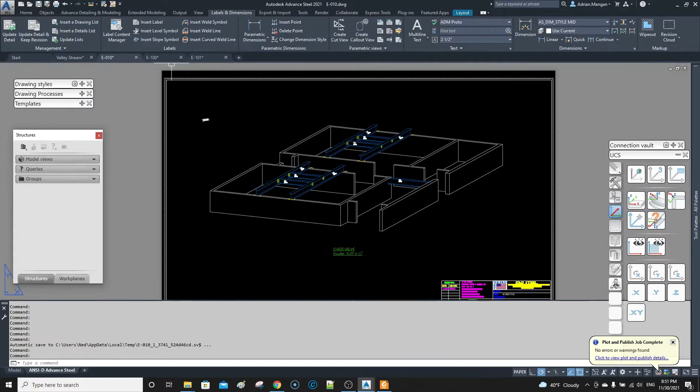So I'm going to finish here, or start where I finished the last video. We have already output these three drawings. So we have this one, and I'm not going to clean them up. I'm just going to leave them the way they are for now because we won't waste any time doing that.

And we have a couple of views here, which obviously you want to move around, put some hatching in, just general labels are right. We're missing the weld label off that one, things like that.

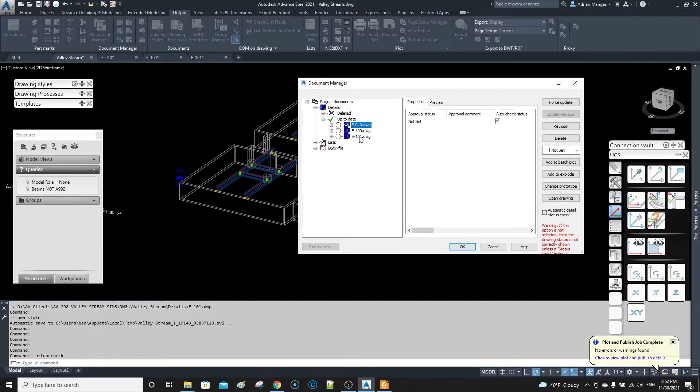All right, so let's say we want to output this project to a PDF. So what I do is, we want to send an approval in. So let's go to output, document manager. Okay, and let's go to our details, and we can see these three are up to date. So select all three, add to batch plot, come down here.

I did not want to print there, so this will print these out one at a time, so they'll all be separate files.

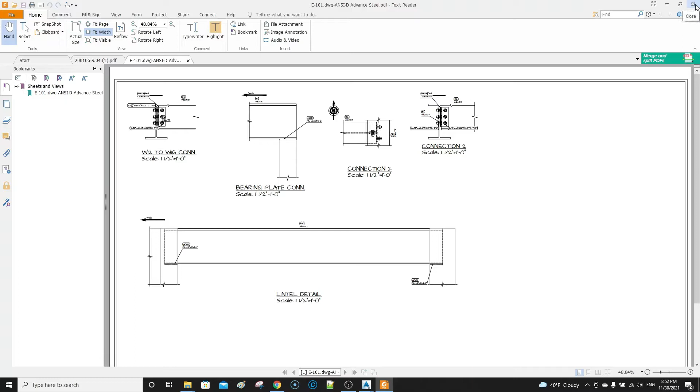So you can see my walls come out in gray because I have them set to gray, and I have them set to plot to that color. So let's close this for a second. Let's go back here for a second.

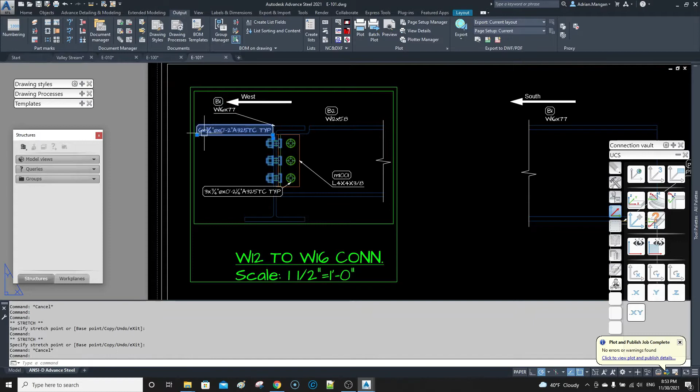Let's just, I'm not going to add anything, but let's try and make this look a little bit better. All right, so we'll just move a couple of labels around. And you know, you want to add in your dimensions here.

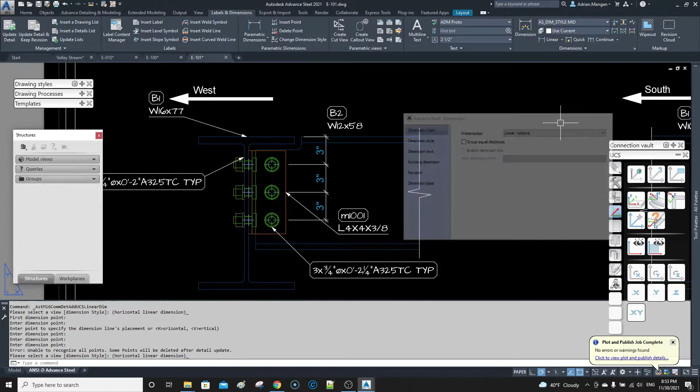Now, you can set it up to have all these come in automatic, which is fine. The dimensions can be a little more difficult to get right. But for now, I'm just going to leave it like that. We'll move it in a little from the corner.

All right, so to output this, if you want to change your output, we just go to plot here. And this is your plot style here. So you can have different ones. But I just changed the Advance Steel one generally.

So you can see color 1 is going to come in as black. And if I go to color 8, you can see it's going to come in as object color, which is the gray color. And then also this gray here, 253, I have to come in as object color. Most of everything else comes in as black, so that they plot out as a black PDF, which is what you want.

Now, sometimes I will put things in red, and then I'll just switch this to come in as object color. But for now, that's fine.

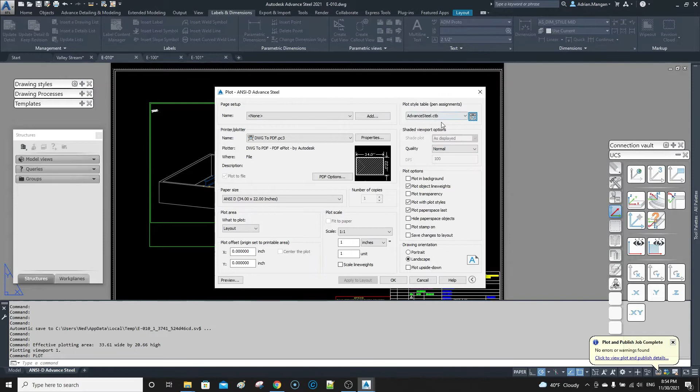So this is assigned to this drawing. So if I come in here and this prototype, if we come down here and check in here and go to page setup and go to modify, you can see that it's set up here to use that one.

Controls whether the properties of plots that are assigned to objects are displayed on the screen. So I don't need that on. So that's fine. Sorry about that.

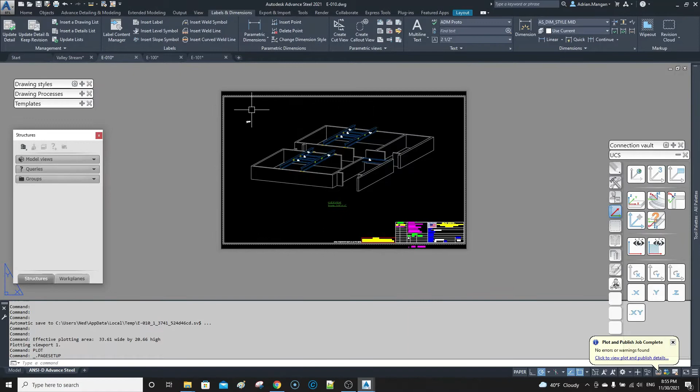So what I want to do is we want to plot this out. So we'll go back to where I was a minute ago. We've got the document manager, and I want to plot them all out into one PDF. So what I'm going to do is come in here, select them all, add to batch plot.

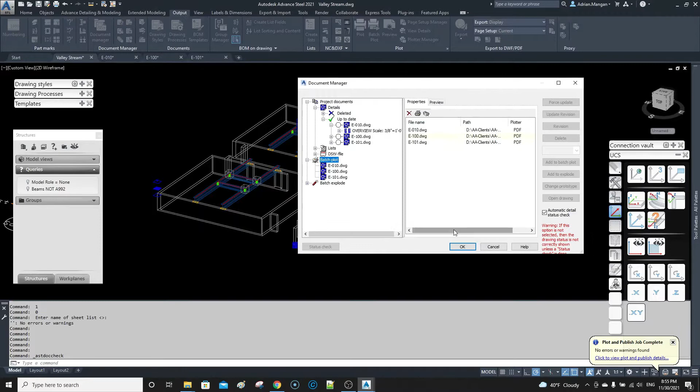Now, if anybody wants to send the DWGs, you can also come in here and do add to explode. And now if I go into the batch plot, choose a plotter, go to PDF, and I don't want to do single file. I like to output them as a multi-sheet. Now some people do single files. Okay, and then print. So that's going to print those three out.

You can see it works away here, and it'll open it automatically, or it should. No, it doesn't always. So what I'll do is I'm going to go into the folder, and it'll be printed out with the DWG.

So these are the three I did by mistake, so I can delete those, and this is the one that I want to send for approval, right? So I'm going to rename that, and we'll rename that approvals and 0, because it's going to be the first one, and then I'll give it the date 11/30/2021.

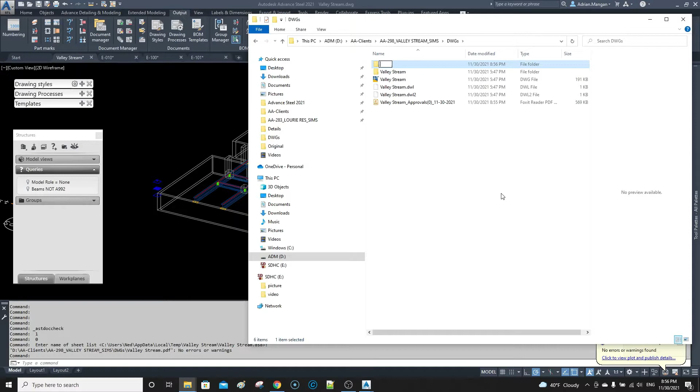And that's going to be our approval, right? So what I'll do now is I'm going to do a new folder in here, and I'm going to just call it Fabs, and whatever you want to call it after that, it's up to you. So I'll just call it Fabs for now. I'll go back to the drawing.

So what we can do now is we can output these files. So let's say it's approved and they want the piece details. I've already numbered it, so now we're ready to output. So let's turn off the cameras. Now what we can do is we can do this in 2 phases.

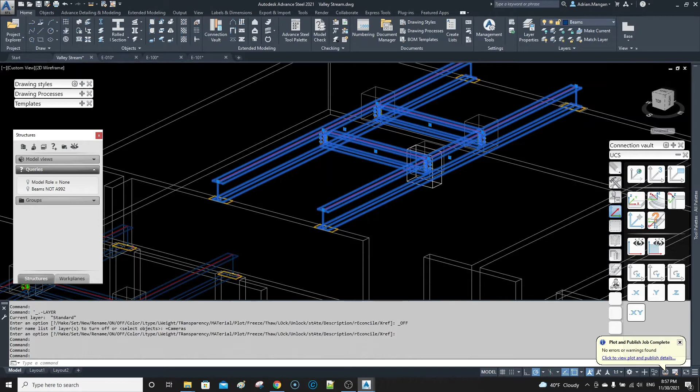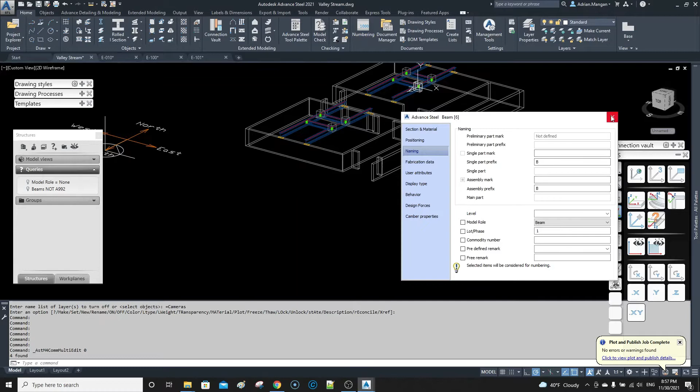So what we can do is we can select this, and what we'll do is right click Advance Properties and Naming, and we're going to call this lot phase 1 and tick this box. Now ticking this box takes this into account for numbering, so I'm not actually going to do that in this case. And then we'll pick these other 3 beams,

Advance Properties and Naming. Did I do 2 for the other one or 1? So I'll do 2 for this one. Did I do 1 for this one? Yeah, I did 1. Alright, sorry, losing my mind. So 2. Alright, so this is set to 2 and this is set to 1, and I do not have it affecting the numbering. So you can renumber if you want to, or you can not renumber.

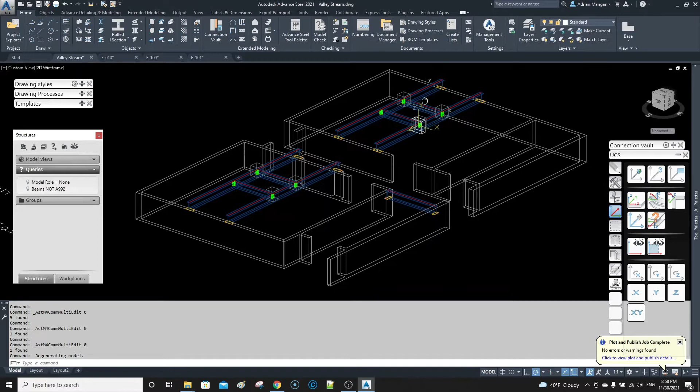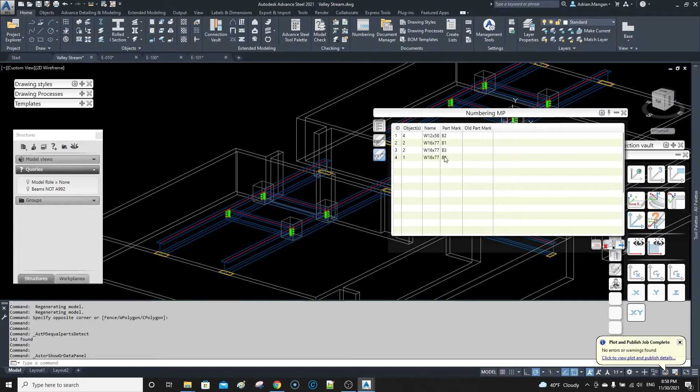Now I want to output the material lists and all that, so it's probably good practice to run the numbering. If I didn't tick the box, it shouldn't change any of the numbers for me. So let's just see. So I didn't tick the box and everything is fine. Now if I did tick the box, it would separate these 2 from these 2. So 2 of these would end up being numbered as the next available number, which is B5.

So I won't do it right now, but you know what I mean? If I come in, if I select all these and tick the box next to the lot phase. So I'm going to leave it for now. So the other thing you can do is create a query if you want, and what you can do is objects, and you can do steel beams, folded plates, okay, general, and assign a color, and we'll call it yellow.

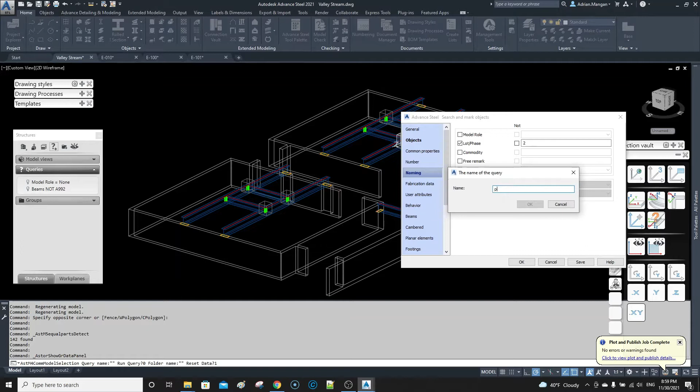And let's go to naming, and I want to do lot phase, and I want to do lot phase 1. Let's do lot phase 2, because I'm not sure I'll do both of them. So save that as phase 2. Okay. And that's saved that up here as phase 2, you can see. So okay, and now it has selected everything that has phase 2. So every beam and every plate, every folded plate, every folded beam.

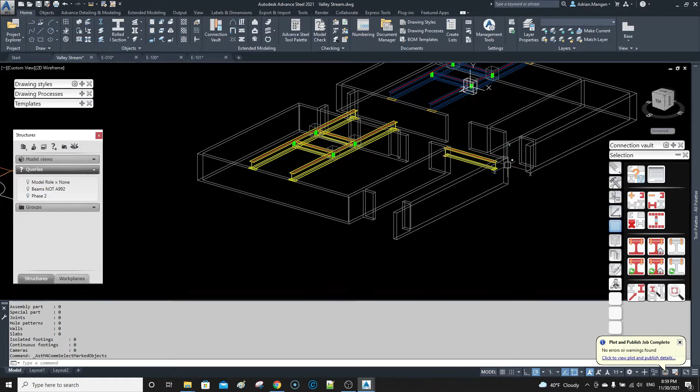So what we can do now is we can select all of those, and if we want, we can separate the files for this. So what I do is I have a token in my lists, so I'll come in here, and let's say I don't have the project data in here, so let's put the project data in here. So let's call this Valley Stream, and project number, we don't have a project number, and client is myself, and the building is Valley Stream, and the location is Valley Stream.

And then you can come into your project info, and I already have these 2 set in my template. So let's put today's date in, and let's put in next month's date. Now what I do down here is I have attribute 2 set to architect, attribute 3 is for the engineer, and it'll fill it in my header, in my title block. Number 5 then is the one I used in my material list, so I'll call this phase 2.

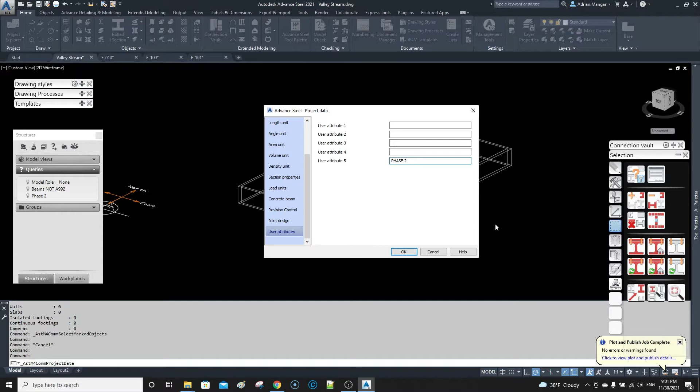Okay, so I already have highlighted the phase 2 beams. Now I'm going to select them. So I've selected them, and what I'm going to do now is I'm going to do a material list. So let's come over here. I'll do an assembly list first for these. This is just to show you. I'll go back. I'm just going to do one list for each, but just to show you how you can select a phase and then put it on a drawing.

So you can see now in this phase, it's showing you the two B2s that are there, and the two B3s and the one B4. So that's the B4 that's over the door. So you can see, and it says up here phase 2 because I have that attribute in this box here. It's an assembly list, so that's fine. So what I'm going to do is I'm not going to save that.

What I'm going to do is I'm going to go back in here and change that token or change that attribute, and I'm just going to call it structural. Okay, and now I'm going to select all the steel here, and I'm going to go to assembly list. I don't create lists the other way. I like to do it this way, and just create new ones each time.

So here you can see 2 B1s, 2 B2s. These other 2 B2s are separated because I have the lot phase. So if I remove the lot phase, these should go in as 4 beams. So you know, I guess I'm not really in a hurry, so let's... we won't be able to delete them that way.

You know, I'll just leave it as it is for now. If you don't put the lot phase in, it'll keep those two together, right? So I won't get into it now because I'll have to go back and delete the numbers. So I'm not going to worry about it.

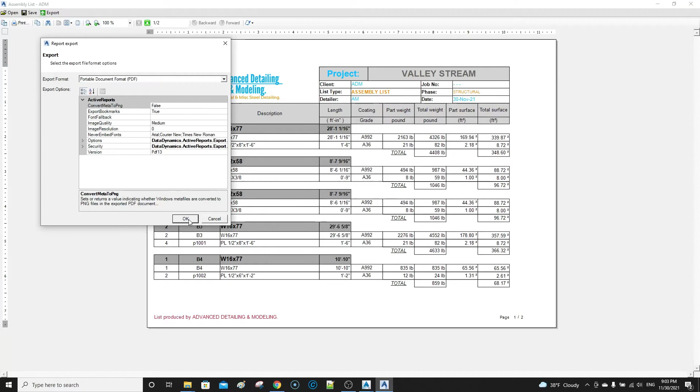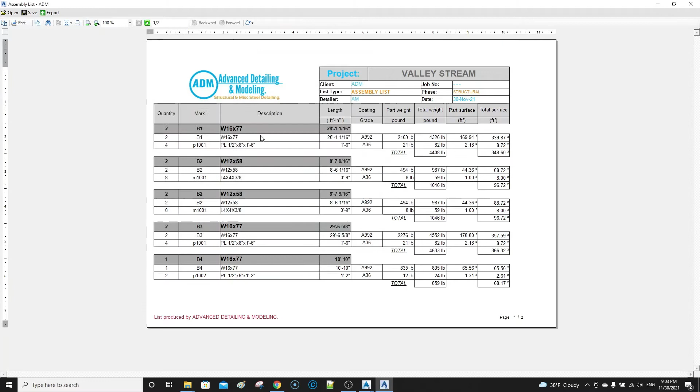So we're going to output our list here, and then we're going to export it, and we're going to save this. It's going to be in the folder we want it to be in, and we're going to call it assembly list Valley Stream. Oh, sorry. Valley Stream, and today's date, and save that, and then we can close that. No, I don't want to save that, and then it's already highlighted, so we'll just go to the next one.

We want to do material list. So the material list now shouldn't differentiate between these two beams. So let's see. So you can see it's 4 B2s here because right now it doesn't care about the lot phase number. So you see we have the plates here. This is all controlled inside in your bill of materials. You can change the order of these by material or by number or by weight, whatever you want to do. I have some videos on that.

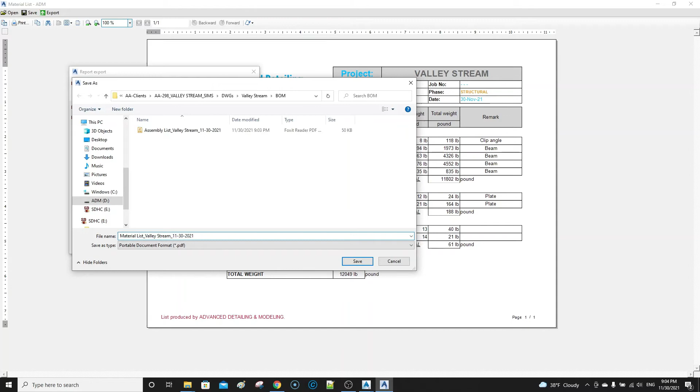So I'm going to export this. Okay. And I'm going to click on that name, and then I'm just going to come in here and change this to material. Okay, save. And then I'm going to close that, and I don't want to save that.

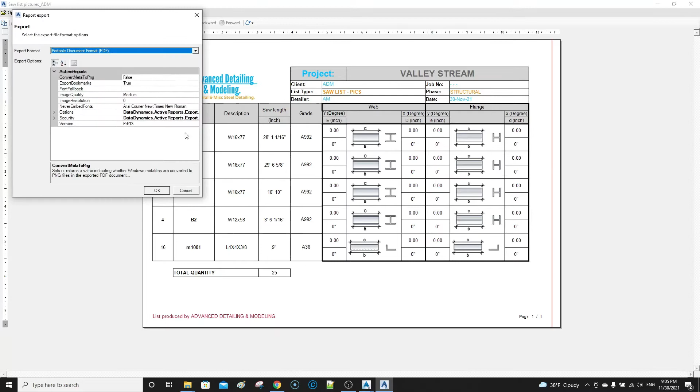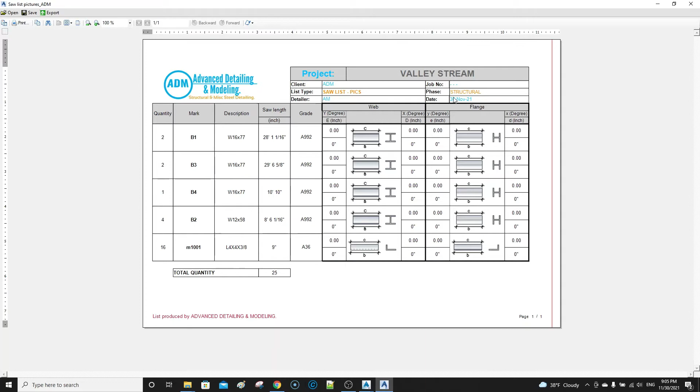And now I'm going to do a saw list with pictures, which is helpful at the start. That'll be the first one they want. These are all cut straight, so it's going to be a pretty straightforward list. This is it here, so it shows you the cuts and the angles, but there are no angled cuts on this one. So we're going to export that. Okay, select the material list, come in here, and saw list, or cut list as I like to call it. So you can see the structural is coming in here again, so that's my attribute 5.

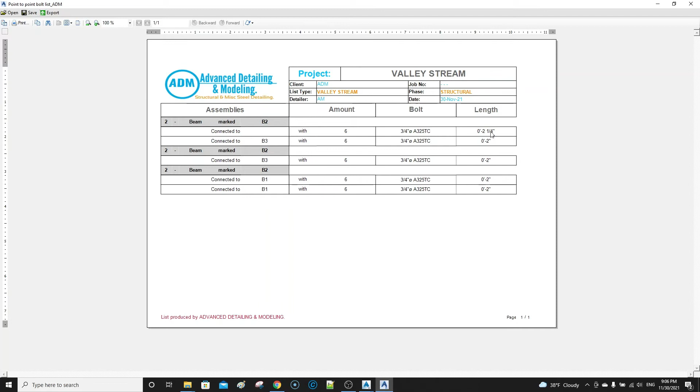Yeah, so the lot phase, I think, is kind of screwing this up a little bit. So 2 B2 beams here. Yeah, so that's why it's getting separated, because of the lot phase. It looks like I might be missing one somewhere. So anyway, I'd have to look into that. There's a mistake there for some reason. So it's the B2, the B1, B1. Yeah, it's got an extra line in here of these 2 1/4 inch bolts. Anyway, I'll just close that out for now. Let's not get into that for now.

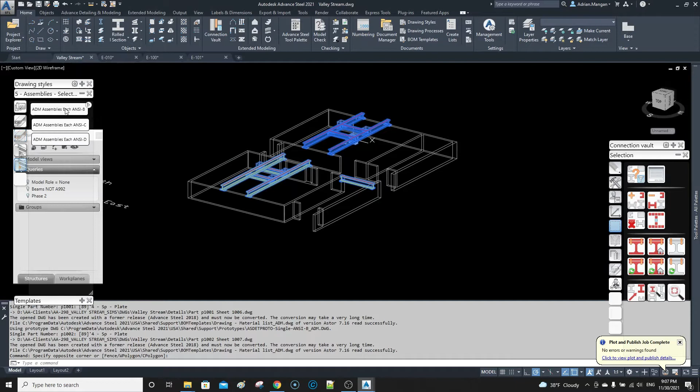So now you have your lists, right? So the next thing is you want to do your piece details. So you're just going to select all these. You're going to come in here and go to your single parts selected, and I can put the single parts on ANSI B. Okay. And you can see it flickers through every drawing one at a time, so there's not too many drawings. And then we want to come in here, select them again, and we'll do assemblies ANSI C.

Okay. Now some of these I don't have set up perfect yet, still working on it, work in progress. I'm certainly no expert. Just feel like some of the simpler things, you know, will get you going. I don't need to do everything. Just for small projects, this will be helpful, I think.

So output, document manager. Now you want to print your lists out at this point. You can see I have not exploded these. So you want to go in here, explode the documents. Those exploded documents now will show up inside here. This has just appeared, and these are exploded documents in here. So that's useful. Your bill of materials are in here.

So what I'm going to do is I'm going to copy those. And we'll come back here and we'll put them in here. Paste. And then we also have our approvals. We'll want to send them so they know where to put the parts. Put them in there. And the document manager details. And you can see here's all your part details. Update required for these because I was messing around with the lot phase. So it's okay for now.

So let's open all these and we can see what we have. We can see that's a single part. It'll take a second to open.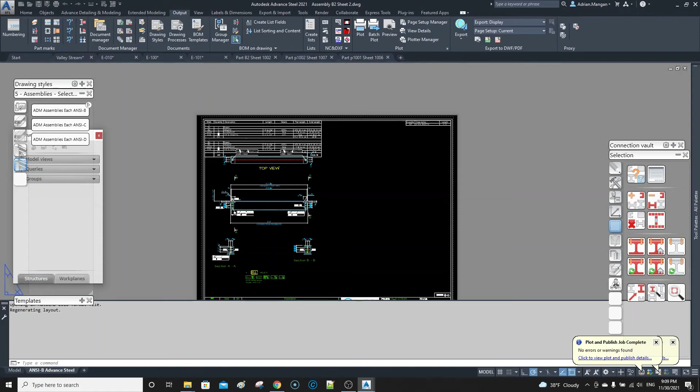That assembly looks okay. Some of them come in kind of funky.

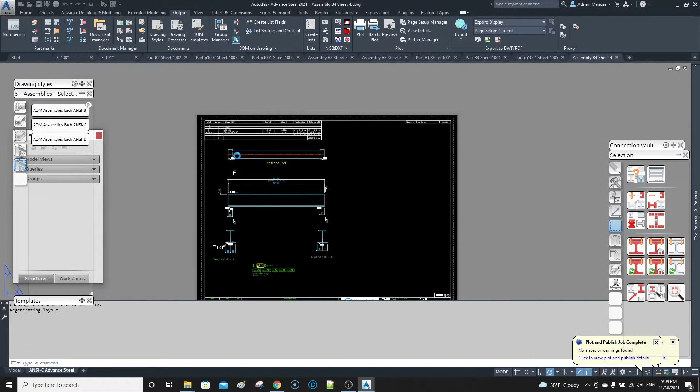Now I'm working on my laptop here, so this is a little bit slower. Please excuse my voice, I have a bit of a hoarse throat. So just give it a second. Like I said, it's usually open quicker on the PC at the office.

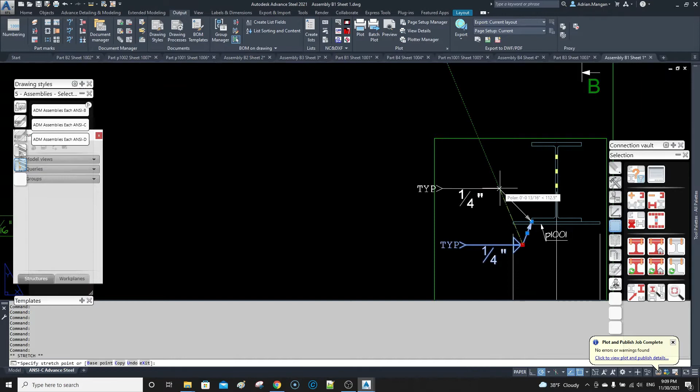So that's everything, right? So let's do this pretty quick. Let's try and tidy it up. I'd probably drag these two over. You have a weld detail here and it says typical, so you should be fine. The reason there's not one here is because I only put the weld on one end. So if you want to have the weld both places, put the weld on both places.

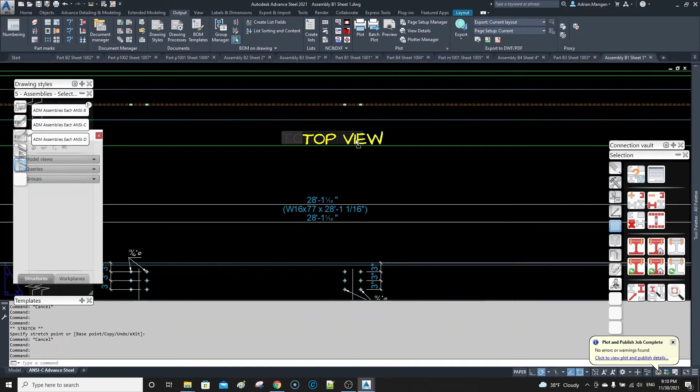So it's showing you the plates, so drag these out. You can see this is giving you a top view. Some of my clients don't understand that we use third angle projection and that a view that's on top is the top view. So you can see I also like to put this in so it's 6 feet between connecting members. So that's pretty straightforward. That one is okay, let's say.

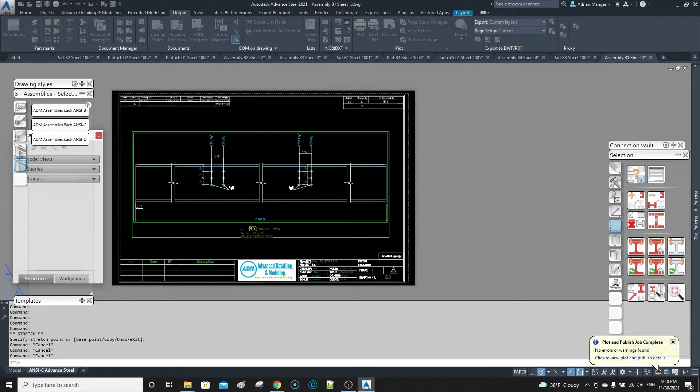So you might want to have a quick look up here, just make sure your list is okay. But so come in here. I'm not going to get into it too much. This one looks okay, right? We got the dimensions here, dimensions across the top. Okay. Now I might miss something, but I just don't want to drag this out too much. So let's move this up.

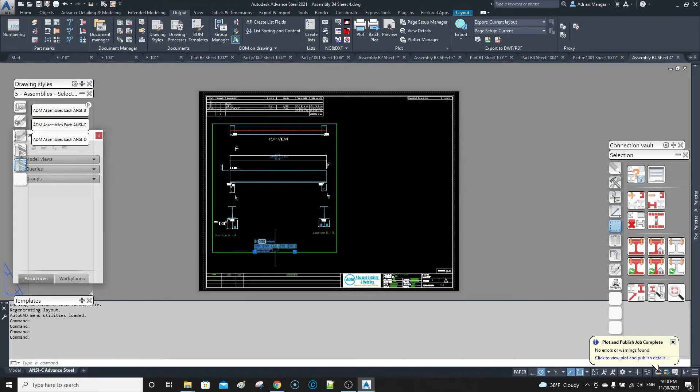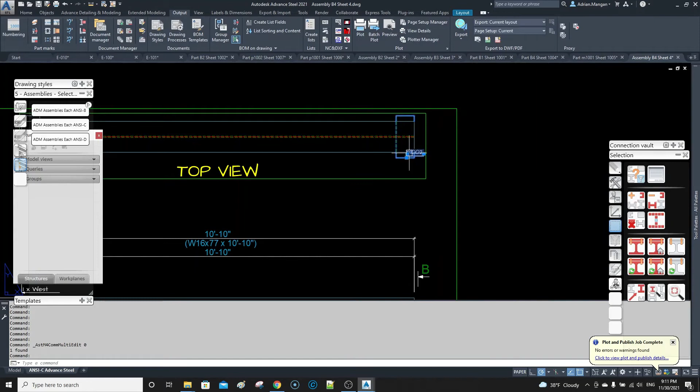I mean, if you want to rescale anything or check your clipping, just come in here. You can rescale it here, come into your clipping. Sometimes the clipping is grayed out. That's because it'll be set to automatic here. See the automatic? So that's okay. So we can close that for now. That's okay. You know, obviously you want to drag this down like this.

And you have this one. And you have your weld symbol here. You don't want the weld symbol pointing from the wrong side. So just things like that you want to tidy up. Close this. These clips, you might want to make them bigger. So you might want to come in here and you might want to up this to 3/8 or 1/2 inch, something like that.

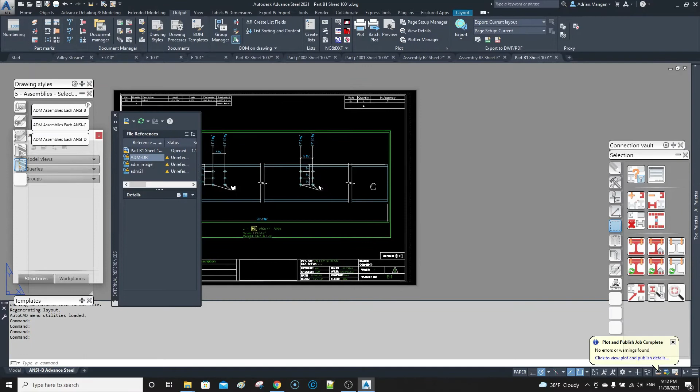So you can see over here, because I play around a lot, I've got some unreferenced references inside in this drawing, which I have to go in and delete. So I'm just going to ignore this for now. And that's just the beam. That's the lintel beam. And that beam looks okay, so we'll close that one.

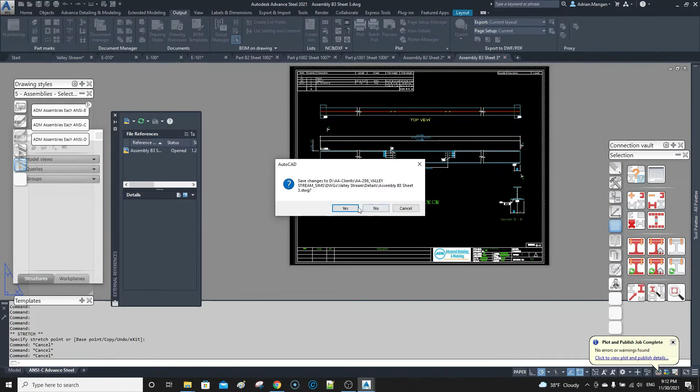Assembly, so you know, I'm not going to get into it, so some of them you'll have to drag. Probably because I haven't the page set up properly for the work area, so maybe you want to go and revise that when you're looking through. So close that one. And what else we got?

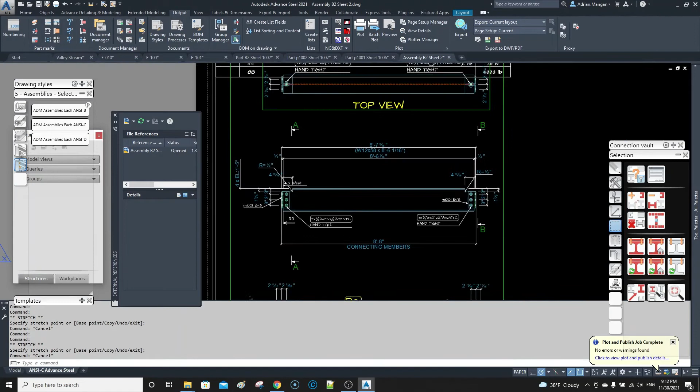Alright, another one here. This one has the clips on it, so I have these set to hand tight in mind. So this is a label I've created myself, because most times my clients just want to hand tight these bolts. It's good to have them tight because you don't want the guy to try and install them with loose bolts. It's a bit of a pain. So if you have a crane or something, that can be a pain.

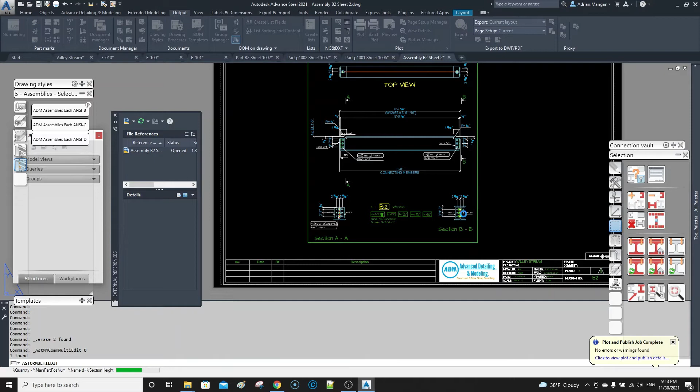I don't need these ones here, so I can revise this drawing. If we come in here and check the scale, let's say you can up the scale and make it a little bigger. Everything else seems okay down here from a distance. So you just want to move. I don't need these because I have single parts. If you want to remove them, you can. You can see now that that's clipped that.

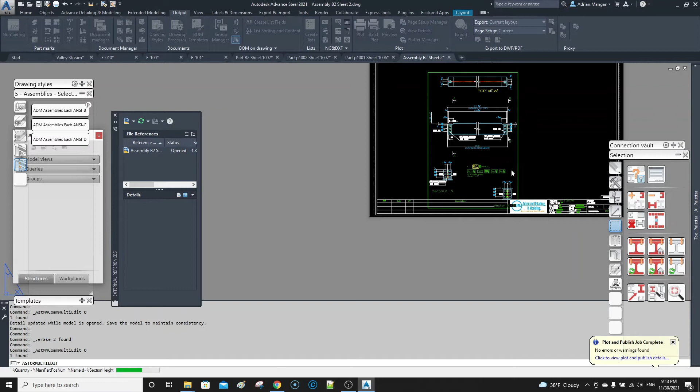So what we can do is we can go into the clipping and you can either remove the clipping, or what I like to do is put this up to 6. And then it won't go off the page. But this is a small enough beam that it's going to remove the clipping totally. Now let's see if this, yeah, this one moved back up, so that's okay. Let's call that good enough. And now we got our plates, and we're going to have 8 of those plates, so that's good. Yes.

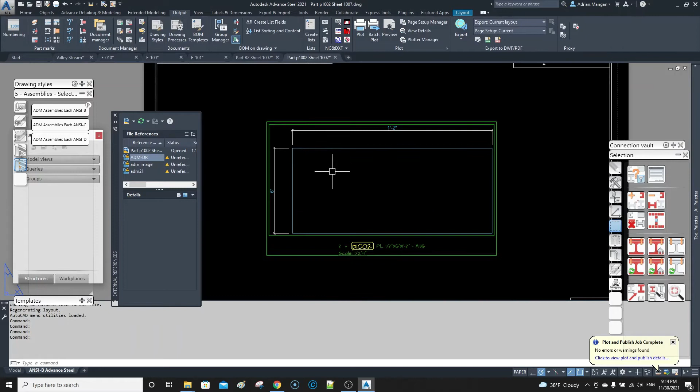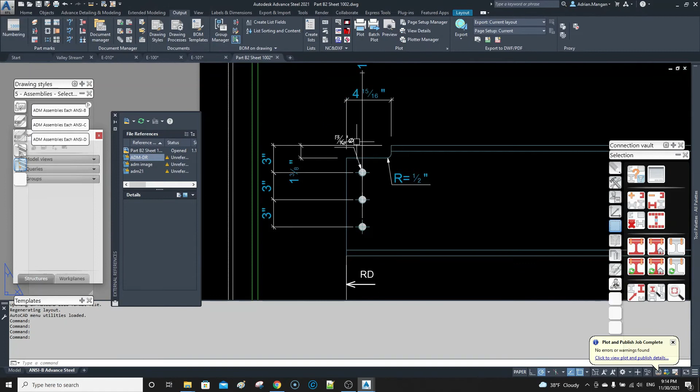Another thing I do sometimes is on the assemblies with these plates, I should have shown you before I closed them. On the assemblies with these plates, sometimes I put it in as a field weld, and I'll just put wire to ship so that the plates will go with the beam, but don't weld them on in the shop because they need to be welded on site just in case the wall is not exactly where we think it is. So let's say that one is okay.

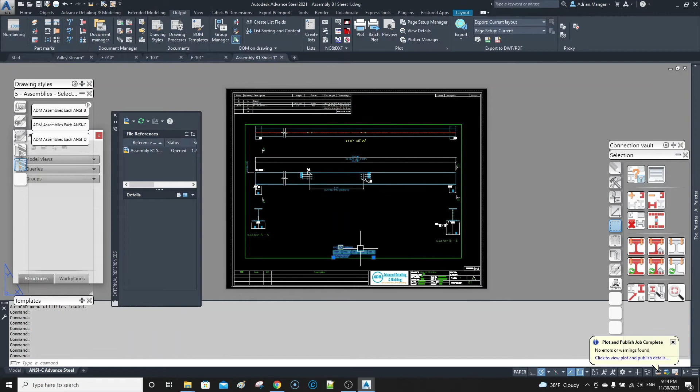So let's go back and we'll open one of them. Let's open B1. And if we go to B1, we can see, of course, I never straightened that one on the page. So let's pull that one down. So you might want to put in here just wire to ship, and then I'll put the weld on site.

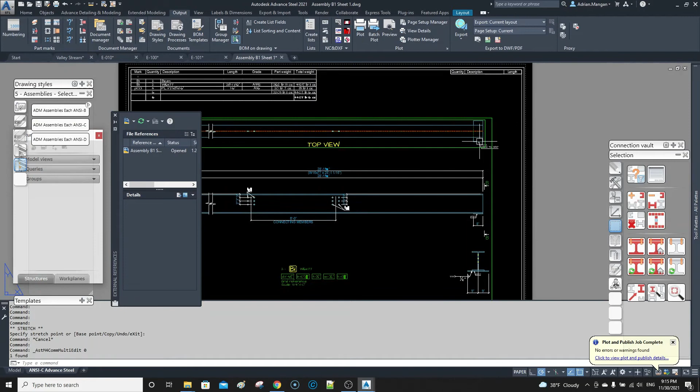So I'll put wire to ship, so it'll be on the drawing at least, and the guy will look at it and go, alright, I'll just leave this with the beam. So that's what some of the clients like to do.

Alright, so let's say you have your assemblies, so now you want to output them. So you already have your list, so he's gone and got the material to make the beams. Now you need to give him the piece details. So we want to come in here, document manager, okay. And then we're going to output this the same way. So what I generally do is I'll do the assemblies. Choose a plotter. Okay. And I'll print those out, and then I'll come back in here and I'll go in.

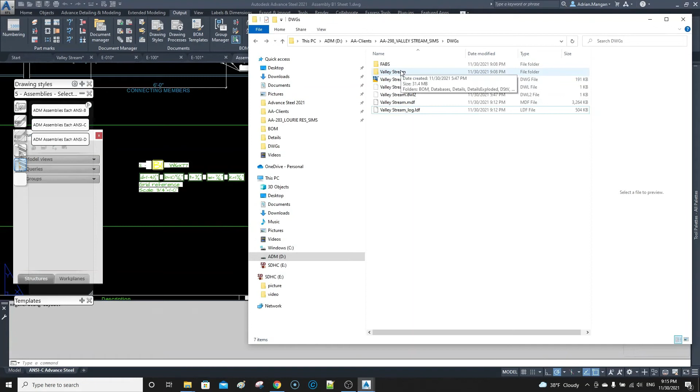It should appear right here once it's done. And it's taking a second just because it's my laptop. Honestly, usually doesn't take that long. So yeah, it's only 4 pages. I don't know why it took that long.

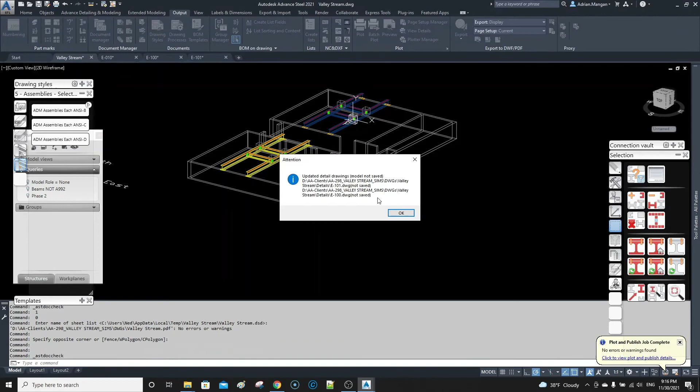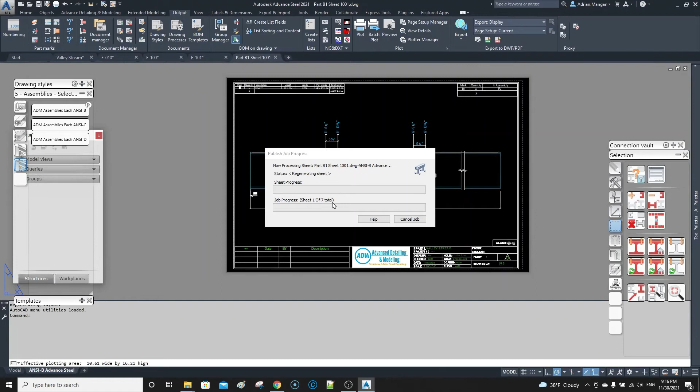Alright, so basically you're going to rename this Valley Stream assemblies, right? Then you're going to go back into your document manager, and then you're going to come back in and select your single parts. Now this is how I do it. Maybe there's a better way. It probably is. I'm sure a lot of things I do are not the right way or the best way. But so I'm going to print them out. Same thing. You can see 1 of 7, and it'll go 2 of 7 all the way through the sheets. And then that's going to appear in the same location in your drawing folder.

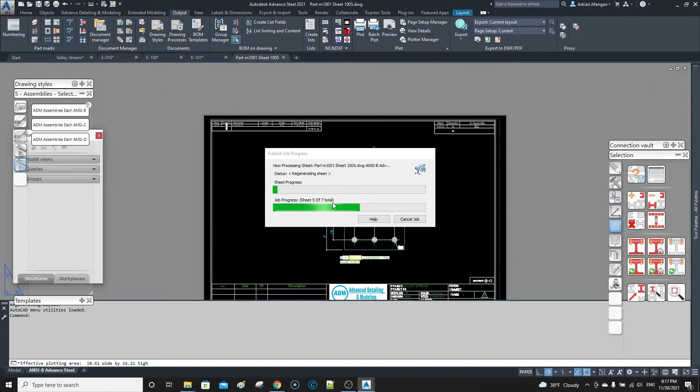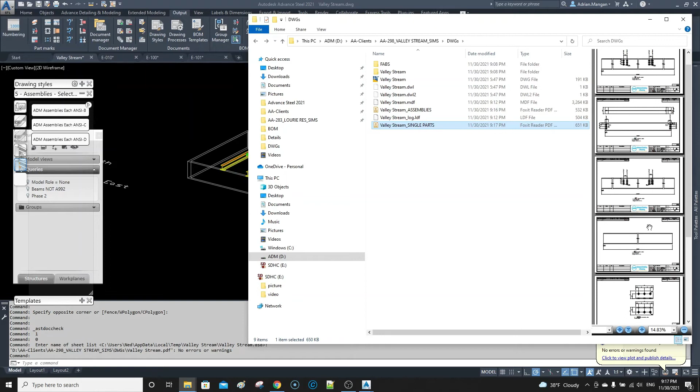So now you have your approvals, you're going to have your piece details, assemblies and single parts, and then all you need is your machine files, right? So you can also export the model if you want. Maybe I'll do that at the very end just in case. Alright, so that's outputting. So let's go to DWGs and let's rename that. And then we'll call that single parts. Now, like I say, you probably need a little bit more time to clean them up, but they're probably close enough right there. I'm sure he'd call me if something's wrong. I don't want to output them that fast, but for this video I will.

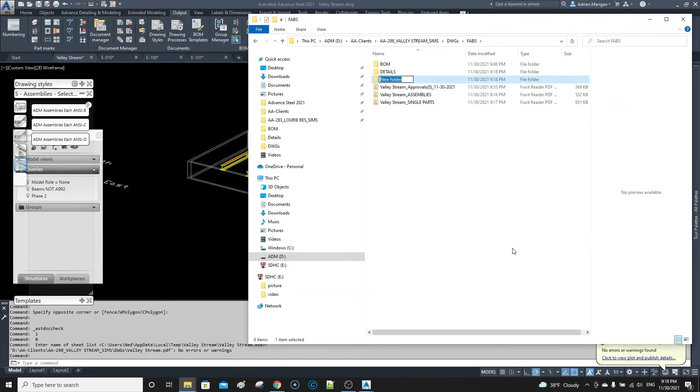So copy them up into your fabs. I'll come in here, new folder, and I'll call this details, and then new folder, machine files. So that's what you need. Now we need to get the plates. So if we come in here, you can filter, or you can just select. You can just go and select your beams, and then go to your output, and you can go into your settings here if you want, change your settings around. I don't need to do that, so I'm just going to output my NC files, and you can see they have already been created. If I go to the folder and go back, DWG, Valley Stream, DSTV, NC, you can see here's your NC files, the 1 and the 2, because I only did these ones.

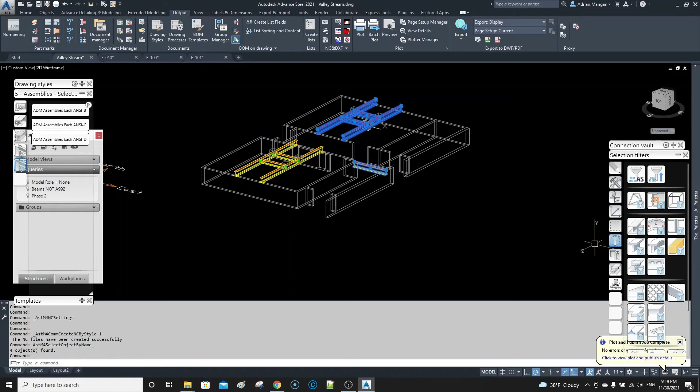So now you can also filter. So if you come to your filter tab, you can see I can filter beams. Sorry, I filtered this, which is tees. So you can filter beams, or you can use your queries over here to do it. So I filtered the beams there. Now I'm going to do the NC files. You can see they have been created. If I go back to the folder, you can see that there's the rest of them. So the clips are considered beams.

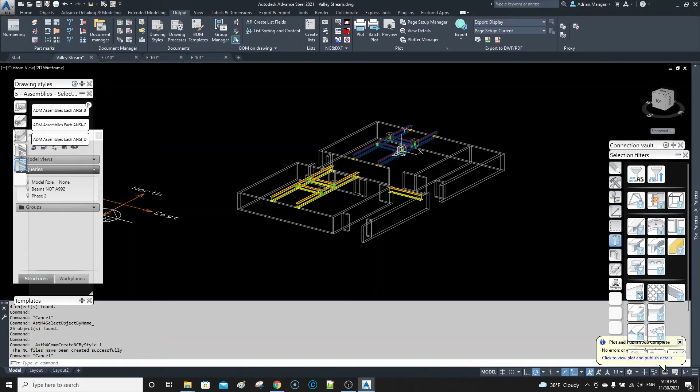Now I'm going to select all the plates. You can see they're selected there now. And then I'm going to go to the DSTV, or sorry, the DXF. So those files have been created. So if I come in here, you can see these are associated with AutoCAD, so that's why they have an icon. So there's just 2 different types of plates, which is exactly what we have. So then I'll just come back here, copy this, go back into your fabs, machine files, and then drop that in there.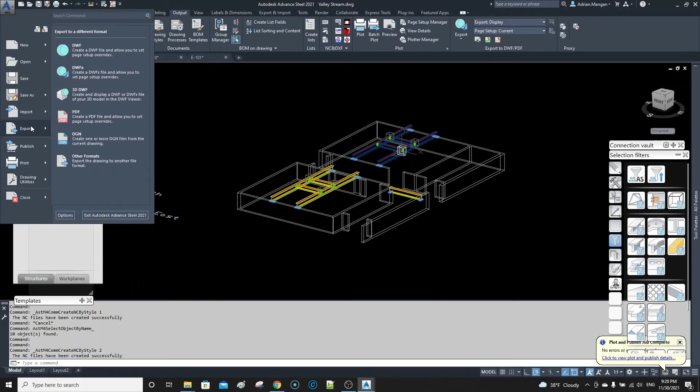And now put the details in there. Alright, so now that's it. Now I can zip that up and send it off. What you can also do is upload this to online. So let's go here, export 3D DWF. That's not the right folder, so just be careful.

And that's good. And then I'm going to go online, and I'm going to go to the Autodesk viewer, which I haven't been in a while, so I don't know if I have anything in here. I have one. Upload a new file, select the file. I can come in, and also I can drag and drop, so I can come back into the one that I already have opened and go to DWFx, drop it in there. It'll take a second.

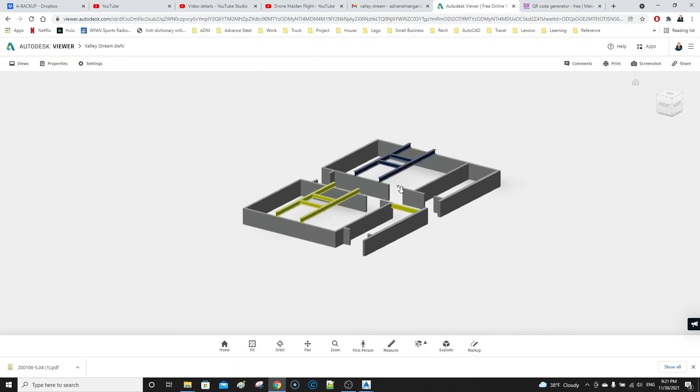Doesn't take too long. What I'll do now while that's working is let's go to QR code, and you can use any of these. This one I just used yesterday. Actually, I'll try this one again. So I could go back to your viewer again. Here's your folder. Now, because I had these selected, they come in as yellow, so just be careful. So before you export it, get into your model here and deselect everything with that X there. This one here, clear marked objects. So I'm not going to go back and do it again because it's fine.

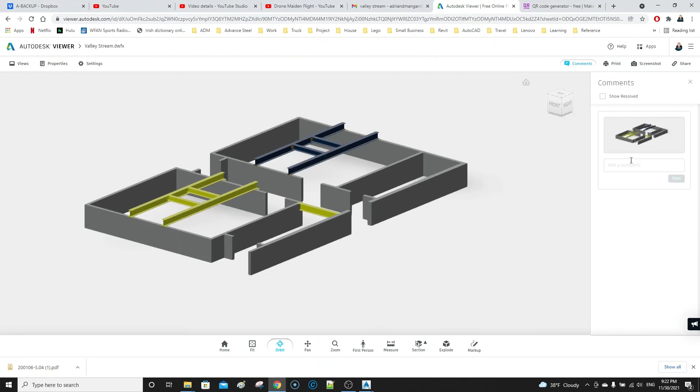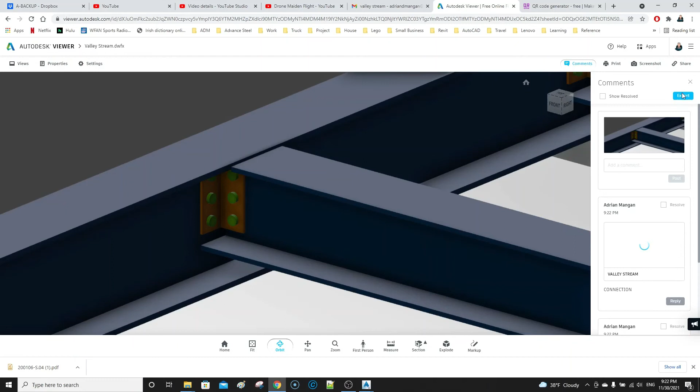And then if you want to send this to a client, you can comment on it. So I can zoom in here, and I can go overview, or I can come in here and we can call this connection, and you can keep going here. So it's pretty useful, this. So you can post all that. You can also export this PDF if you want. So this PDF will export here. You can see it down here. So it comes out as an export file. My name is there. So we close that.

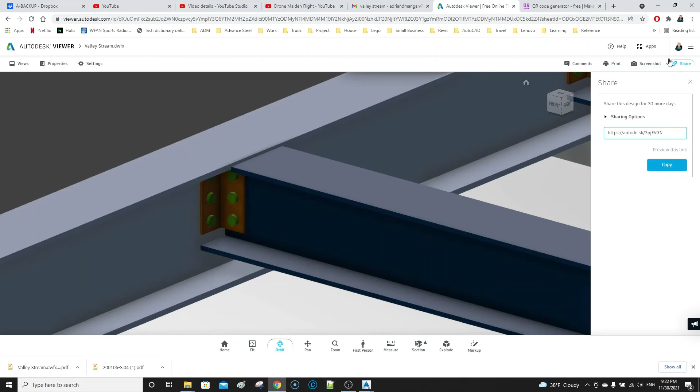Back to the viewer. We want to share this. So let's select this. Copy. Sorry, or just copy it there. Go back to your QR code generator. Paste your link. Generate the code, and let's do one like this, and then download the code.

It'll pop down here, show in folder, and cut this, go over to your job folder, and we'll drop it in there, and let's rename it so we know what it is and what date it is, or what approval it is maybe. So rename as Valley Stream, and we'll just call it Valley Stream 0, right? So we know it's the first approval. I don't usually name it like this, but it'll do for now.

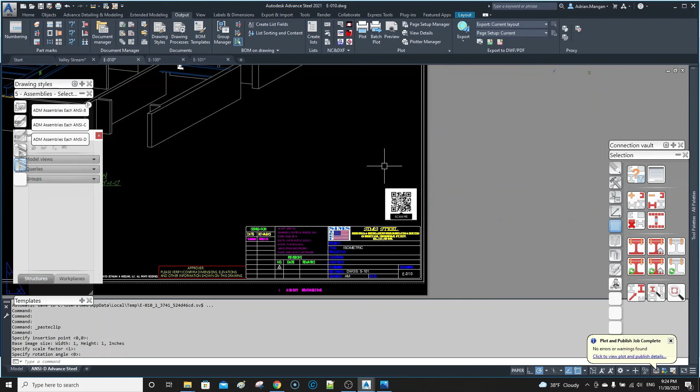So then open this, and we can do copy, and then you can go back to your drawing if you want. In Advance Steel, go back into your drawing and come back in here and Control V, and you can copy your code in there. And then when you plot that out again, you can plot it out the way I did earlier, or you can just plot out the one file, and you'll see it'll come out with the QR code on it. Maybe you want to put the date or whatever, and then they can scan this and it'll bring them to that model you've uploaded online.

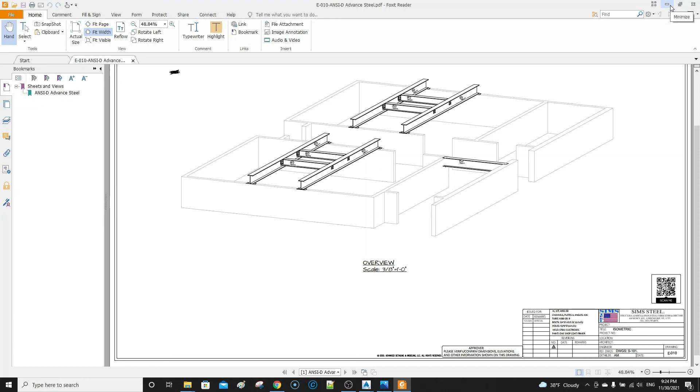So, alright, I think that's enough. Kind of see the process, whether that's the way you want to do it or not, I don't know. People probably have a better way of doing it. Just thought I'd share the way you can do a small project pretty quickly and get all your drawings, all your files, and even have a model online.

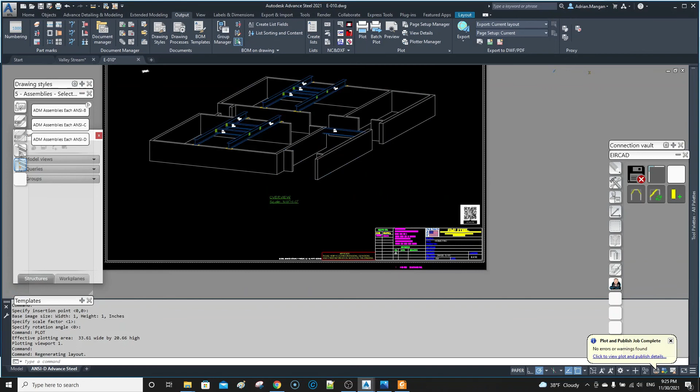The only other issue we have now actually is I've updated this, but let me just do this one last thing. It's quite important, and from what I gather, some people don't know it. So if you can see, this is not filled in. So let's close it. It's not filled in because I started the project. I didn't fill it in before I created those drawings. I just filled it in later.

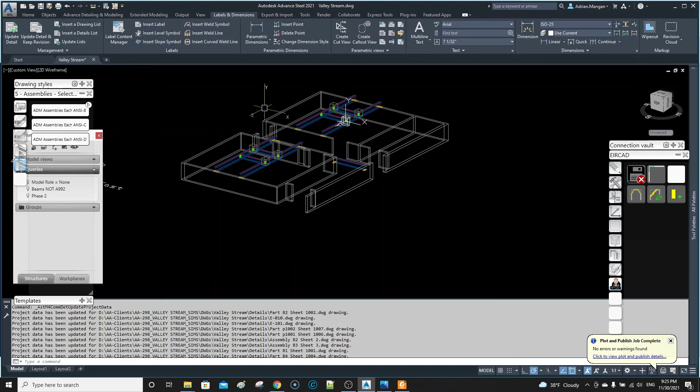So what we need to do is go to output, go to labels and dimension, management tools, update project data. Check down here in the bottom. It should show you it's updated all these other ones, and also these, as you can see, E100, and then there's E010 and E101. So now if you go back to output, these are not up to date now, but let's open them up anyway. Only because of the lot phase I changed. So you can see it has updated this.

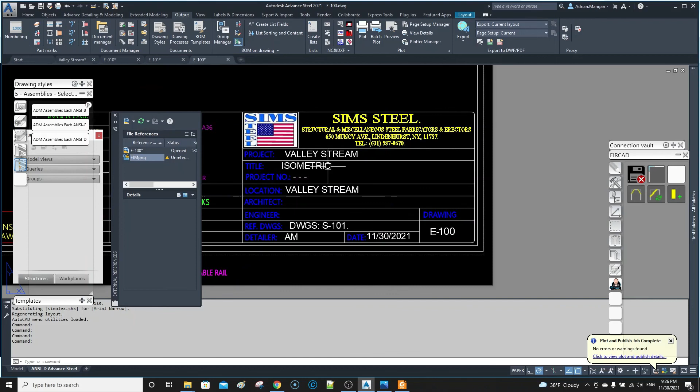Now I never put in the architect or the engineer because I don't know what they are. So that's why those are blank. And this one here, the title, I just change it for whatever I have. So I'll change this to roof plan. Now I should really put this outside the block, so I don't have to go into the block editor to change this. So I would just come in here, change that like that.

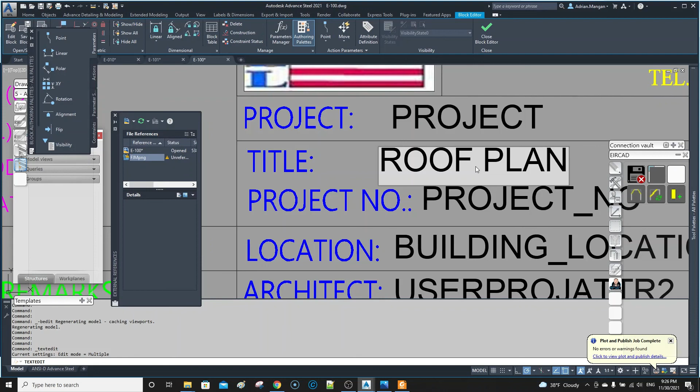There's going to be a better way of doing that too, to be fair, so that'll have to be changed. And generally I do the revisions manually. I find it easier right now, but maybe I'll find a way to do it better automatically. So I hope that helps.